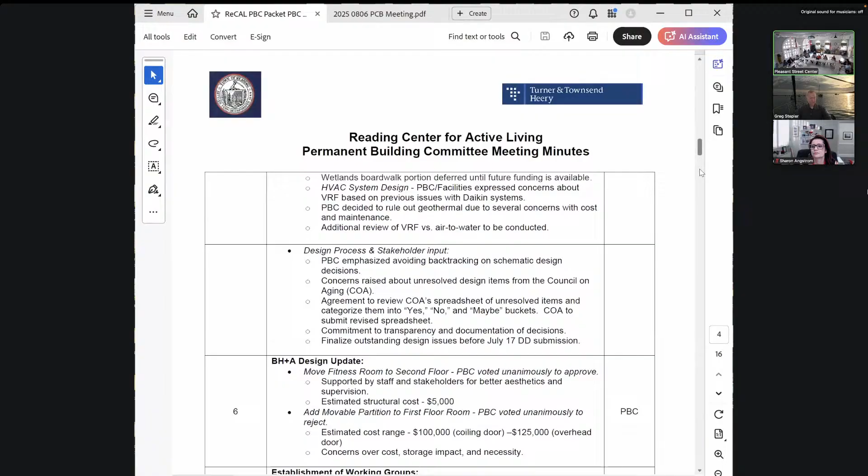Moving on to the next item, invoice approvals. Mark, can you just take us through that? Absolutely. Turner Townsend invoice — I'm sorry, is the chair right here? Turner Townsend invoice, for the period of June and July, in the amount of $45,465. Another one.

Does anyone have any questions on that? Want to take these in order? Mark, quick question, are these based kind of on time allocated, is that how the billing comes through on these? We have a cash flow that we share with the town, and it's a lump sum breakdown per task for phases. And within those phases, it's broken down by hours — design, development, construction documents, all of that. So how many people, yeah exactly, but the contract is a lump sum. Right, and it's allocated out. Correct. Got it.

Motion to accept the invoice from Turner Townsend Heery, dated July 24th, 2025, for $45,465. It says the date of the invoice is July 24th, 2025 — the invoice is the 23rd, the cover letter is the 24th. The invoice was dated the 23rd. Okay, correct, sorry, okay.

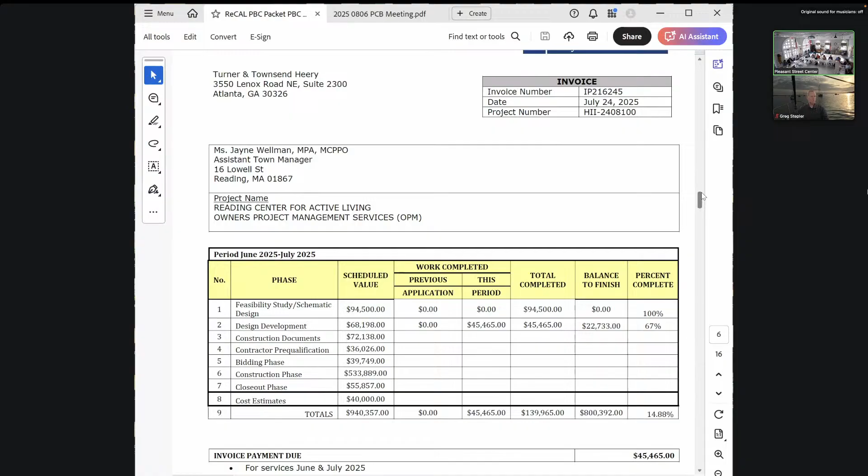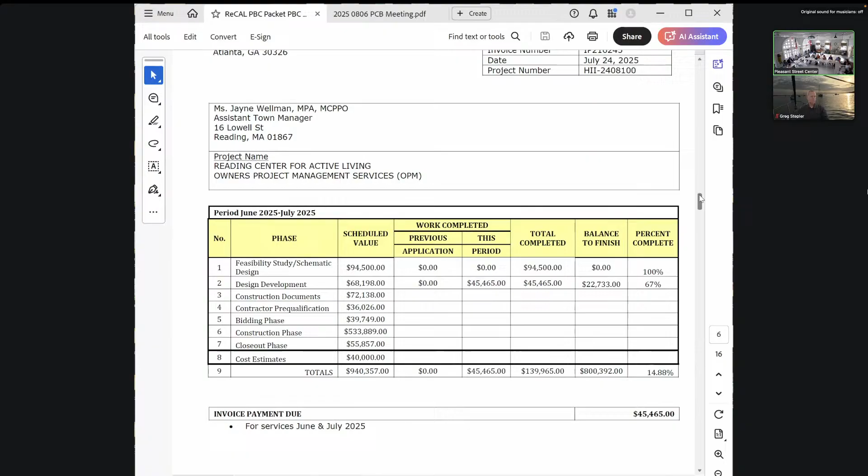Any other discussion? Nancy Toomey, yes. Greg Stepler, yes. John Coop, yes. Kirk's not here. Mark Doxer, yes. Nancy Zimlack, yes. Pat Tompkins, yes. Motion passes. Go to BH plus A, invoice for basic services for the June and July period, $210,000.

I don't have any questions or comments on that invoice. Make a motion to accept the invoice from Bargmann Hendrie + Archetype Inc. for $210,000 dated July 10th, 2025.

Any further discussion? To a vote. Nancy Toomey, yes. Greg Stepler, yes. John Coop, yes. Mark Doxer, yes. Nancy Zimlack, yes. Pat Tompkins, yes. Motion passes.

Is that it? That's it. Okay.

For now. Yeah, I'll turn it over to Mark for Turner. So, budget update, as we showed previously in other meetings, we just go through the highlighted items that we just approved as invoices.

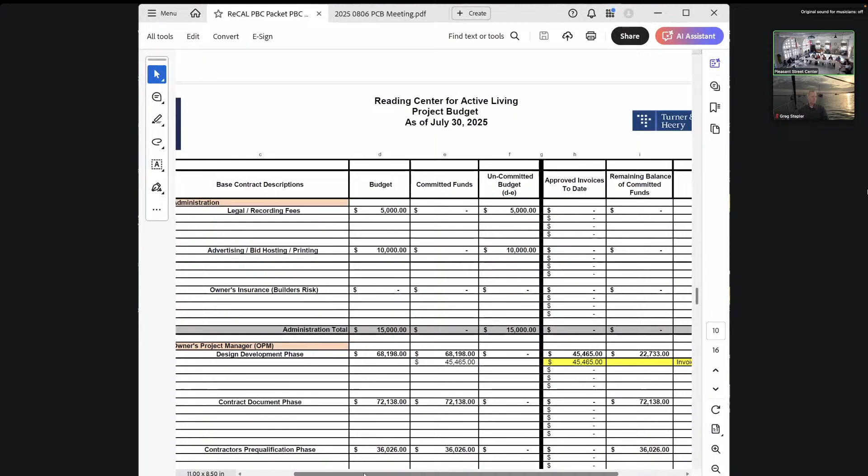We continue on in section 307. We just highlighted an item, information that we received from BH plus A and their financial folks. The estimate had carried a $5,000 figure for a tree survey and arborist, and it's been identified as not required for the project. So at this point, we're identifying that, but we'll do a contract amendment at some point and then probably take that figure and put it into the contingency, so the bottom line balance number still stays exactly where we want it to be. We'll probably provide that next meeting. I will work on it with Joe and provide it for the next meeting.

And then as you get down to the bottom line, we are now at 10% of the committed funds, and 1% of invoices approved to date, and the committed balance of two.

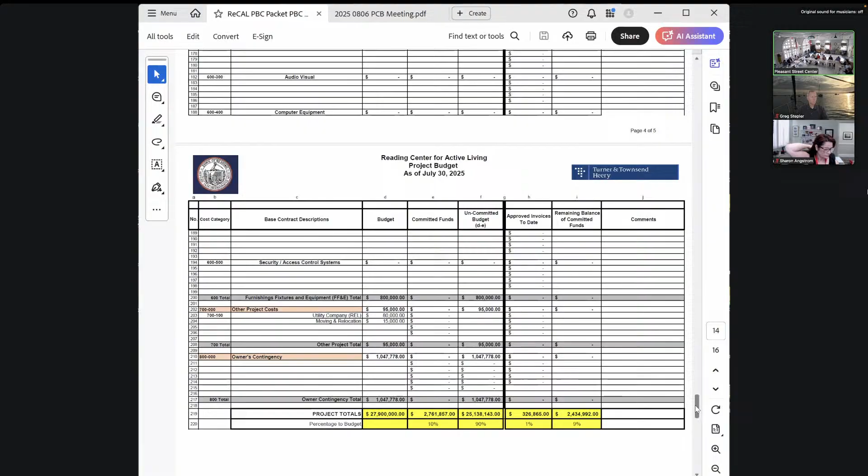So, if there's any other questions on the budget, move on to a schedule update. So scheduling, similar schedule you've seen before, the overall sort of milestone schedule.

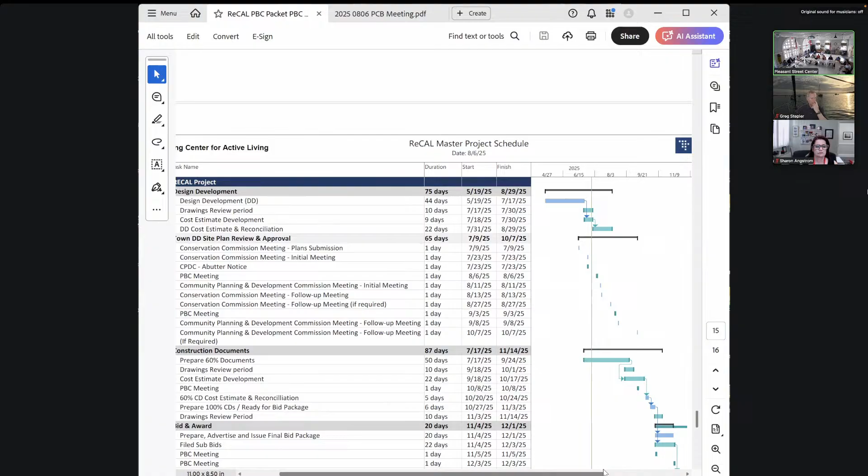We're right on schedule as we are on the DD cost estimate and reconciliation. The estimate came in on the 17th. We have our estimators getting ready to start in a week or so. We're looking at reconciliation of the estimates by the end of the month, and we'll definitely have a reconciliation ready by the next meeting on the 3rd. We'll talk about it in a minute, but the preliminary numbers have come out and we can certainly address that.

As we move forward with design development, we'll start looking at the dates and times for the preparation of the 60% construction documents, the review period for that, and the cost estimate development for that. Right now it's tracking sort of mid-September to mid-October. Got the PBC meetings in there as well. The adjusted date for October, getting ready for the 100% CDs and get the bid package and get everything shot and ready for a review period for 100% CDs by the middle of November. And then look at bid and award through November and December, and hopefully the general bid is ready by the end of the month and get started in January.

Very aggressive schedule, very tight. Think it could be done, but we have to stay right on top of everything. And the design development set, I think, was a terrifically done set to this point. Joel will talk about that in a minute with the estimates. So staying on this schedule, I think we should be able to achieve it.

You don't think construction, anywhere, is gonna be a problem? I was looking at this, there's not a lot of time between when we get the bids back and when we get construction.

It's done on purpose because the site has a huge amount of clearing and it's a very wet site, so it's pretty efficient to do that. If we have a winter like we had this winter, it's very easy to get large vehicles in there to get the trees out and clear the site. So we actually chose the schedule to get in there as soon as they could and not start March or April, when the site's gonna be as mushy as you don't want it to be. So it's to take advantage of the season.

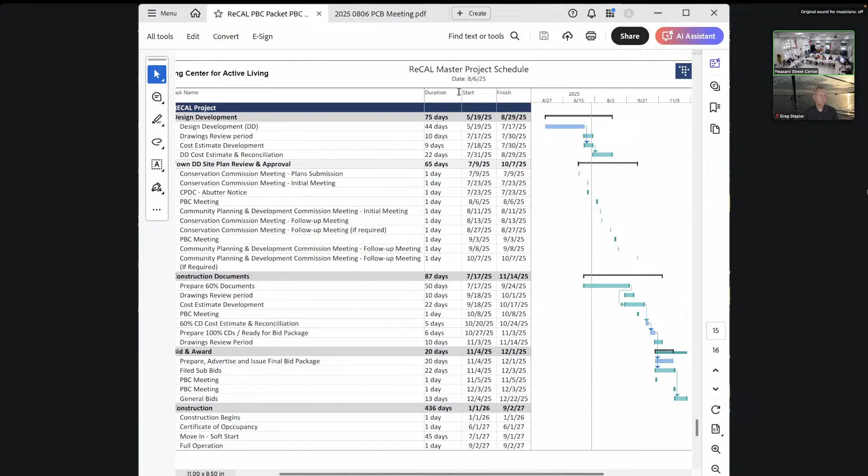I want to talk about the process, where we're at, and as Pat mentioned, there's a preliminary cost estimate.

The reason the process is going this way is that there are a lot of decisions that need to be made regarding the energy systems in the building, add alternates, and site work, and those can't really be made until we have an estimate of the cost of the building systems. So we had to expedite our current cost estimate so we could do the energy model, which we received on Monday, and so we could do some other analyses for the solar collectors and the HVAC system.

So I'll start with the cost estimate, and then the other concern we had was with all of the changes in foreign trade and other issues going on. We were concerned that the last budget we had done was January 15th, and we're now 7 months into a different situation. We thought the numbers would be more chaotic.

This is the preliminary estimate, which is our estimate. We don't have Turner Townsend's yet. We'll get their estimate and put the two together, but we wanted to get ours so we could prepare these other documents. As you can see, the schematic design cost estimate was 21.9. Today we're at 1.3 million less than the schematic design. We're carrying the same construction contingency, the same construction contract total, and the same owner contingency.

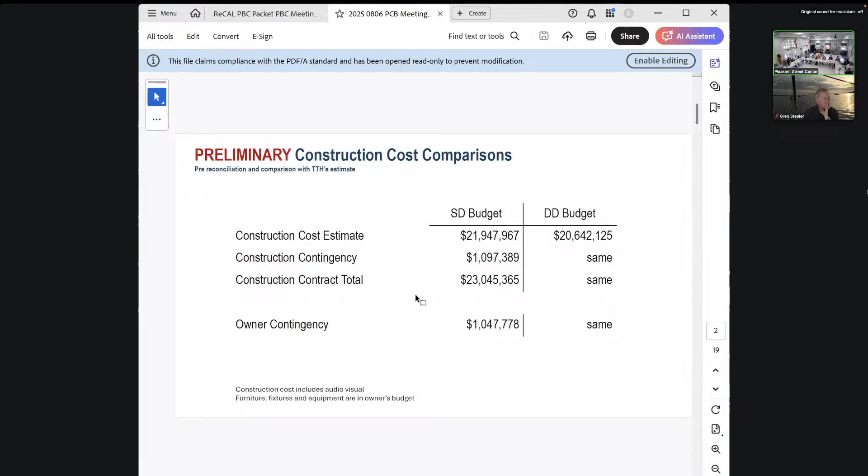While we're at the cost estimate, I know the PBC doesn't have pickleball on their agenda, but since we have a unified site, I thought it was good to show these numbers. I did talk to Jane about that and we didn't want to confuse everybody, but pickleball is also running within budget, currently about $200,000 below. Now pickleball is from the edge of the parking lot over. Everything that ReCal needs, including the stormwater management, is in the ReCal budget.

ReCal's not dependent on this budget, but adding lights is sort of within the target range of that budget. It's $200,000 to add lights, and adding an additional pickleball court is $53,000. What we're looking to do is, that area where the pickleball was somewhat done as a geotechnical analysis, we thought it would be better to go in and actually dig some test pits to get a better view than you can get with a 3-inch boring hole in the ground. So we've contracted and cleared with Ryan, the town engineer, to go in and do 3 test pits to see if we can bring the geotechnical costs related to the pickleball area down, and then maybe get more of those add alternates into the budget.

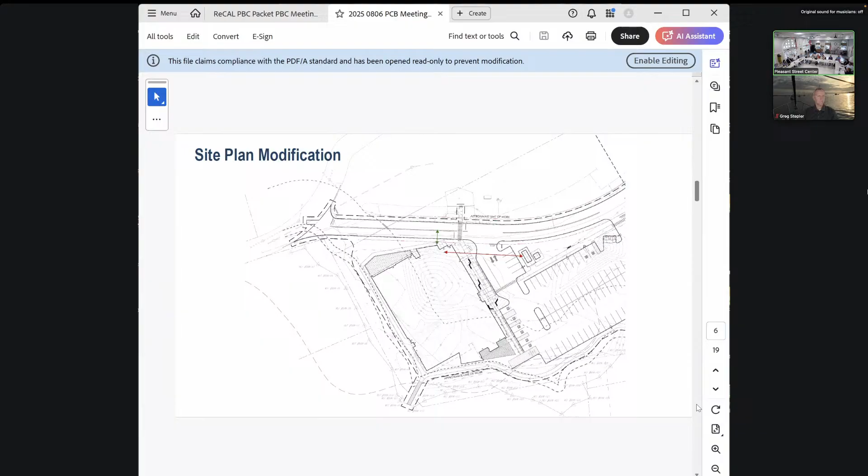Fiber can come in at that point, and that's very good for the emergency generator and the transformer, which are in those locations. So there was a confluence of events that happened. And so when everybody says things are happening quickly, well, it's intended to get all of this information out so people can react at planning, DPW, engineering, and impact the design before it's too late. So it's been, I think, very successful.

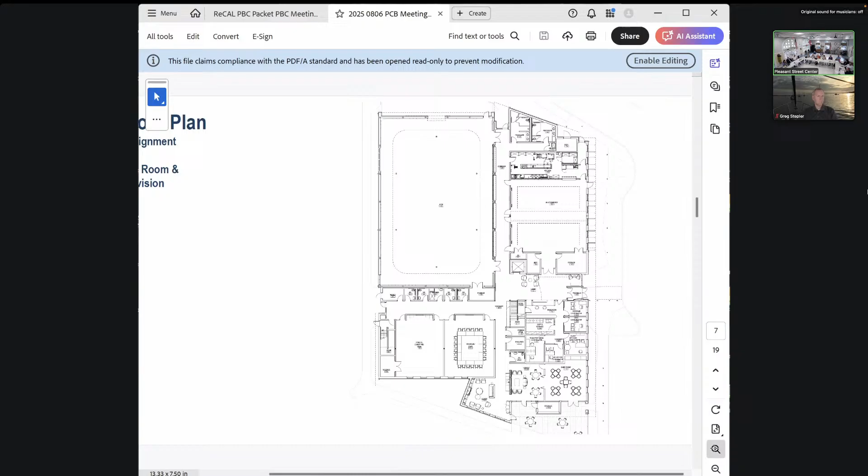What you see here is that the building is simplified. It's chamfered to follow this right of way. We have the electric room at the end because we got rid of that entry. The entry room is... hold on, sorry, bigger, sorry, completely free of the kitchen. So the kitchen gains some area that it lost to the electric room. We have the exit out, straight out of the...

passage corridor for the gym and the multi-purpose room. And we have the nice bathrooms that are off to the side. The ladies' room got enlarged, so it's a little bit more generous and nice for the women's room, and then there's the men's room. I do have a blow up of the kitchen, which I'll get to, but that's really the only change that's happened other than the shuffling of rooms at this end of the building, at the design development phase. And none of those changes increase the cost of the project.

So can I ask a question? Yes, sir. If you don't have that separate entrance, what's the plan for access control? If everyone's coming through the main entrance, let's say it's after hours - so people are going to come in the main entrance, I'm understanding now. So how do we control access to things other than, I guess, the gym and the large meeting spaces on the right? I was under the impression that we had the ability to cut off the rest of the building.

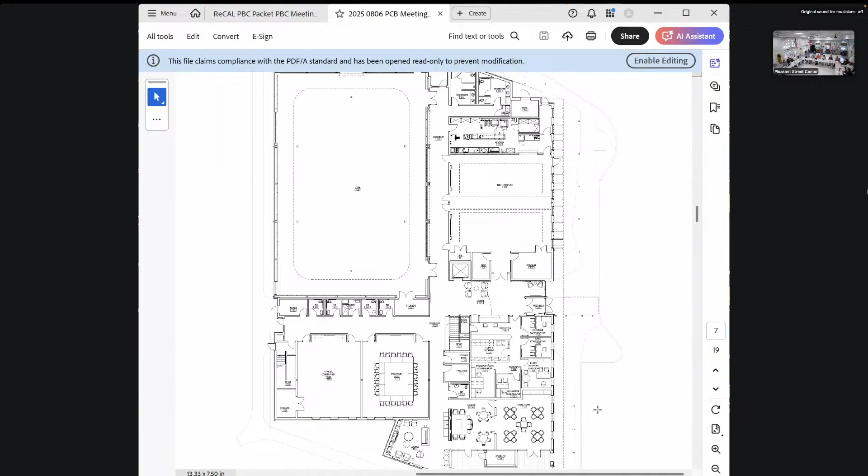I think I need you to advance because we're in the enlargement phase. And we're now looking at the kitchen, so I need to shrink. There you go, thank you.

As a result of the electric room used to bump in here, so this is a revised kitchen design. The kitchen goes all the way to the perimeter wall. We've gotten rid of the exit passageway that used to go as a means of egress from the multi-purpose room. It does not have to go through here any longer.

So what that does is it creates a really great function that we have in a lot of senior centers. Not only is it an airlock, which is beneficial because there's a huge amount of exhaust in the kitchen that you can control by having the double door.

But it's also a delivery vestibule where Sysco and bakeries and all that like to deliver 5, 6 in the morning. They now have this delivery vestibule where they can make their deliveries, place that, and you don't have to have a staff person on site to meet your bakery or other deliveries. Your staff can come in at 7 or 7:30 or 8 and pick that up and take it to whichever area they need to. Works out really well at a lot of our facilities, gives them flexibility on delivery options.

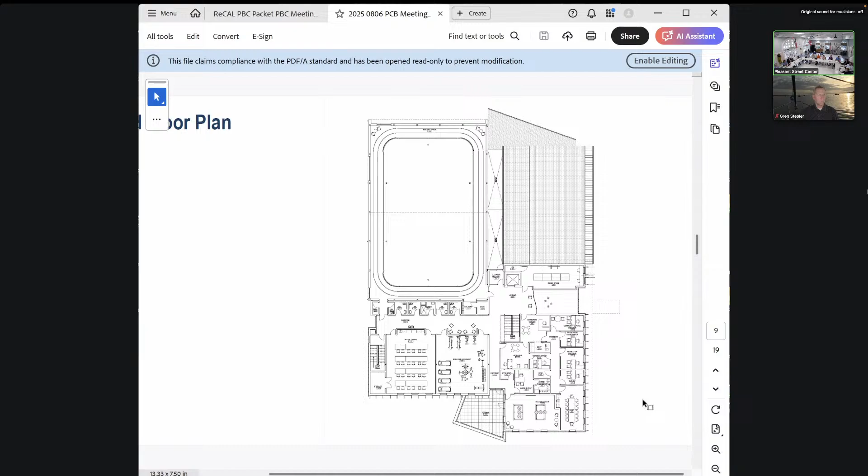This is just a picture of the backside of the building, showing now that the change is the bathroom.

There's the outdoor exercise area outside the gym. We've been discussing using that with the Conservation Commission as artificial turf. I know it can be a bad word, but for exercise it's really great because it drains quickly and isn't muddy. The thought is it will be used by kids and by seniors having exercise programs. The landscape architects really would like that to be an artificial, easily drained surface, and we're working through that with ConCom successfully.

I think the backside of the building actually looks quite nice. You'll see in the future this roof here is the solar roof, not that roof. The nice thing about putting the solar roof on the gym is that it's well protected from the parking lot, so it's not really that visible, and it's hidden that this is a remote site. If someone ever has a desire to throw a rock at a solar panel, it's easy to do it on this roof, but not so easy on that back roof. So we've targeted this area, both sides, for the solar collectors.

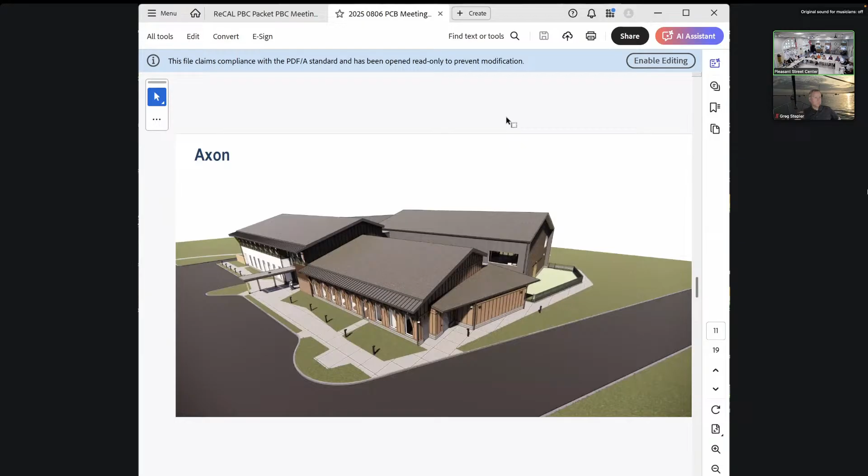We don't disagree, John. Conservation originally was interested in the path as part of the mitigation conversation. Part of the concern with the walkthrough is the topography—it's not a flat area, it's up and down, there is side to side movement. The ratios are greater than 3:1, which is an ADA setting.

So part of the path width and design—even though stone dust can be an accessible path—that topography with the left to right movement is a factor, and they were looking at that as well. The Conservation Commission is still looking at that. The public should go and advocate for that path. I would encourage that with the Conservation Commission, but their job is to protect the wetlands, and they feel they are doing that by asking for this alternative design.

It was a very cool, beautiful day in the nice, cool woods, and it was very hot outside of the woods. So I hear what you're saying. It was fantastic back there, except for the cars.

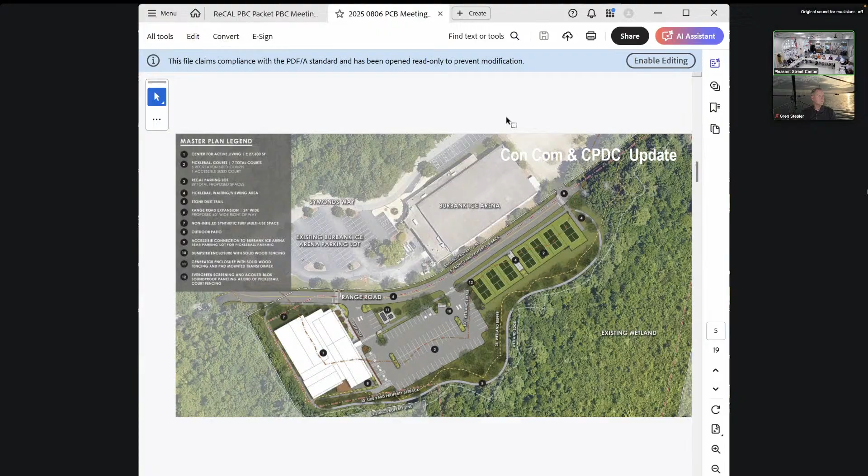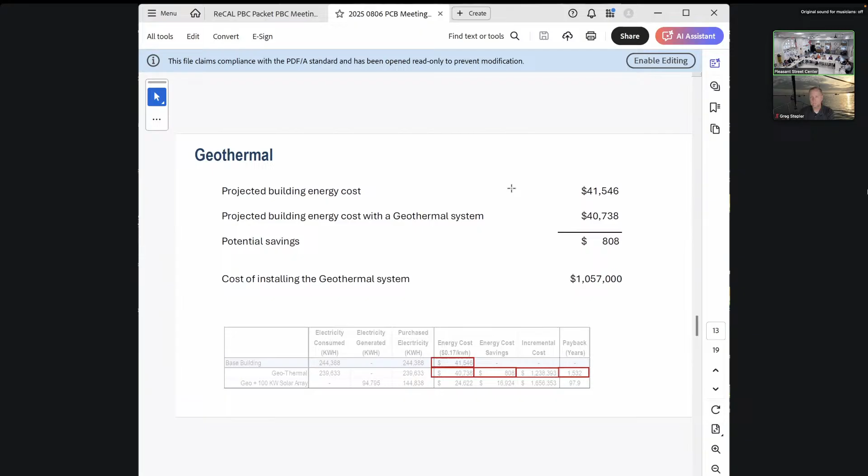Karen just said 10-year payback, but that was 26. No, I think she's referring to that I made a comment that even if the geothermal numbers were what I expected them to be, it would still be maybe 10 years. Yeah, I did see that 26 year and it was horrible, so I apologize for mixing systems there.

I think the solar is a little bit different because the payback is a long time, but it's still reducing the carbon footprint of the building significantly because it's reducing the amount of energy you need to use on the building. So even though it takes a long time to pay it back, it basically pays itself back in the life cycle of the solar collectors, which is 25 years.

The other thing to think about is that I'm assuming it's a simple payback, right? So you're just taking... that's simple payback, yeah. We would assume that the cost of electricity raises by 3% a year, we've all seen that in our bills, right? So you've got to look at that, that keeps going over the life of the system. That's a lot more, it's hard to do that.

We should actually put the cost of the bond in that number too when... yeah, I mean this is borrowing, a lot of costs. More work, but we should be looking at all these as life cycle costs, not simple paybacks. That would be the better way to look at the costs.

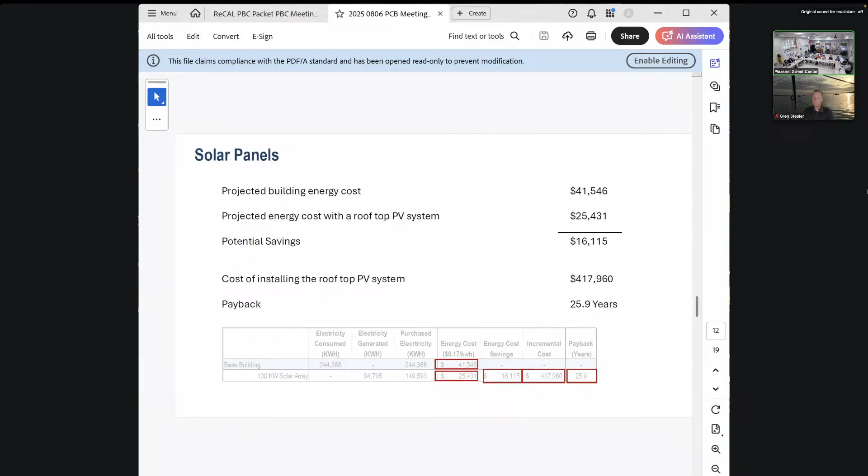So I'm going to just get to, we have, I don't want to throw this at you. CPDC asked us to get the signage in because they'd like to approve all the site signage and the building signage, or at least the locations, so that they don't have to have another hearing next spring or next summer on the signage. They can do this administratively through the planning board. So they've asked us to show them where the building signage is going to go and what it is.

And I have four different versions of it. The sign has always been right next to the front door. One option is we've sort of come to the conclusion that it would be ReCAL, with Reading Center for Active Living below. Not we, but town staff, collectively, the royal we.

The ReCAL lettering is all caps because the signage that's going up by the arena and coming in is going to be die cut in a steel sign, and you can only die cut capital letters. You can't do ampersands and lowercase e's and all that in that font. So the ReCAL logo has gotten to be that. And one option is this.

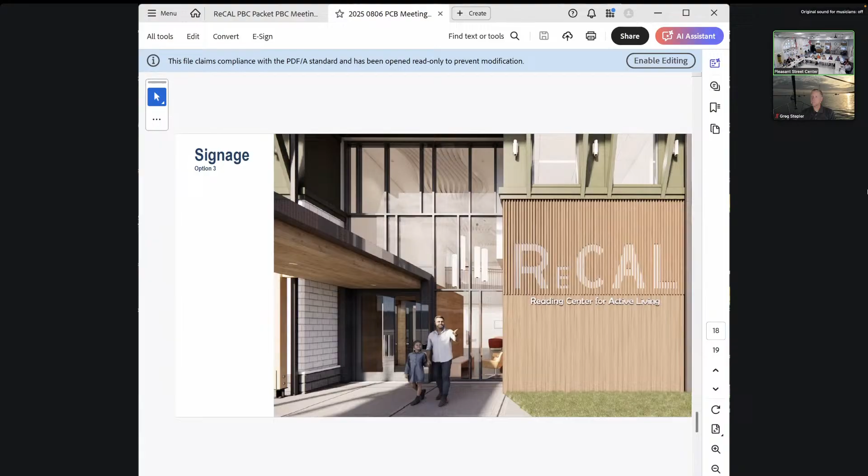Another option is to put it in the center. But then another idea came out of looking at this sign that I thought was sort of interesting, where we'd translate that idea to ReCAL, in that you could make ReCAL a bigger logo cut out of the vertical board and batten that's part of the entry, and then you'd have the name. So that's sort of maybe a more interesting graphic.

And we don't have to have it all figured out, but we want to show the planning board that there's a sign at the entry, there's a monument sign up at Symonds Way, and then there's this building sign, and it's going to be something like this.

And they will have a good sense and not be surprised about this when we have an administrative review for the font—should that be black, should that be silver? We can figure all that out later. So my point tonight was I thought PBC should weigh in on this because this is going in later this week to planning board, and part of the decision starts at the end of August.

So you're looking for a decision on the sign right now? I need a decision to go ahead with at least this location. It's a complicated problem and I didn't anticipate this coming up. And the color of the tile with that.

Will that be lit up? Will there be LEDs behind it or something? You couldn't have it be lit, I just meant put a spot on it. I think we thought that the lower signs would be backlit, and that would just be carved out of the lettering—you don't want a huge one. I thought it was a subtle way to get a big ReCAL. Yeah, it's different, it's cool.

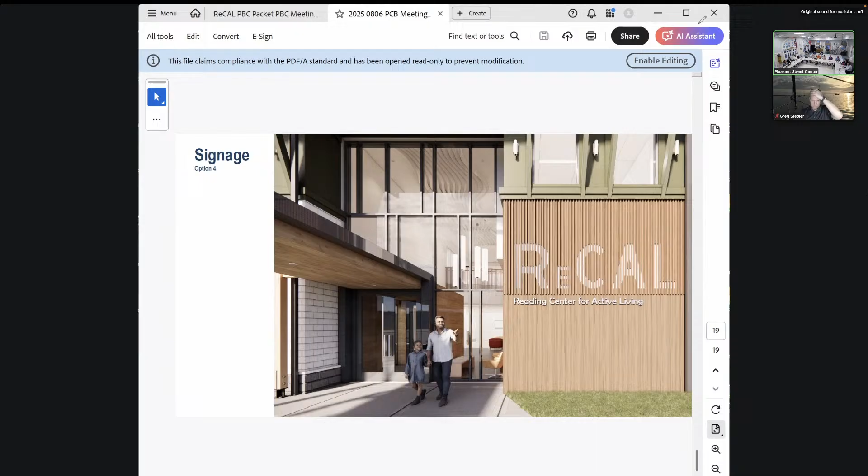Moving on to the next item, the open design comments from Council on Aging. We talked a little bit at the last meeting about design development, where things were, what's incorporated and what wasn't. So what Mark and I—when I say Mark and I, I mostly mean Mark—did with the help of several other people was take the comments Council on Aging gave us as the full universe of open design issues they felt were still open. We went through and created a spreadsheet color-coded green and red. Some stuff's in, some stuff isn't, along the lines of: all feedback's welcome, all feedback's considered, not all feedback is implemented. I believe everything in here is consistent with the feasibility design that was done, consistent with the schematic design presented to town meeting and presented to the town to vote on, and it's consistent with what Joel is currently designing too. So I want to give Nancy or anyone else the opportunity to comment on that and have a discussion if needed.

Would you like me to share the document? Yeah, if you can put it up there, that'd be great. The document Jim is putting up is the one the Council on Aging completed at the end of, or during, the design review process. Our concern was that we didn't know if it had gone fully through the process—we didn't know where some of these things stood, whether they were accepted or not accepted. So we pulled them out from the total package.